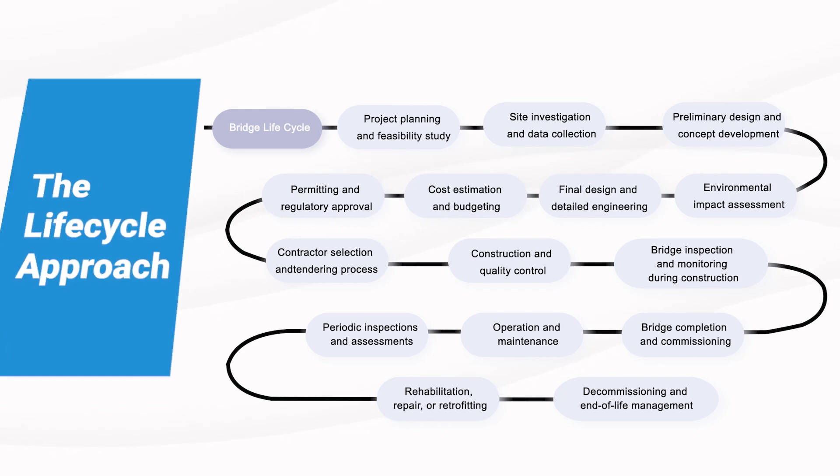So what are the trends, current or in the future? Obviously, advancements in materials, very important. No industry can move forward without material. We see that all around us, battery, everything is about materials. So material science is the key. Engineering, analysis, and design, obviously, that's what we excel in, and we continue to develop that. Construction techniques are changing rapidly. We need to look at that and adapt our designs and tools to that.

Monitoring and maintenance, once again emphasizing the life cycle. Design and construction is 3 years, maintenance and monitoring is 100 years. So how can we not think about that when we do our design, as an important part of the life cycle?

Aesthetics and sustainability, we can no longer hide from these two as we did in the past. In many cities, we drive around and we see, I don't like to use this word, but I'm going to make an exception, ugly bridges, ugly structures. And there has been a study in psychology that people who drive through this environment get depressed by the time they reach the office, because it's a concrete jungle and it's not aesthetically pleasing. So aesthetics and sustainability have to come into that.

BIM-based design we talked about a lot, so I can skip that and save some time. And embracing new emerging technology, we also saw a lot of that today, and I'll just focus on the bridge part of that, and collaborative design once again. So my job is quite easy because Richard set a great stage for me.

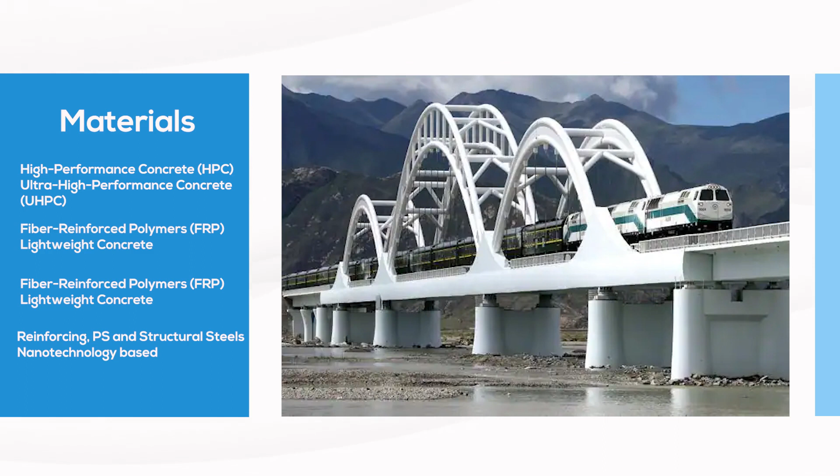It's just amazing. You don't even need reinforcement in a concrete of that kind. So definitely most application will be in bridges. Then, fiber reinforced polymers and lightweight concrete and so many things, and nanomaterials and stuff like that. So that's one aspect of the bridge design improvement that we must watch and closely embrace.

Let me come to structural modeling, analysis and design, which most of you are actually involved in. Now, where are the enhancements going? Obviously, in the modeling, we're getting new elements, frame, shell, solids, isolators, links, hinges, we have complexities there. Analysis, I put a lot of dotted lines because they are moving fast. Linear static, non-linear, construction sequence, long-term effect, moving loads, and so many things.

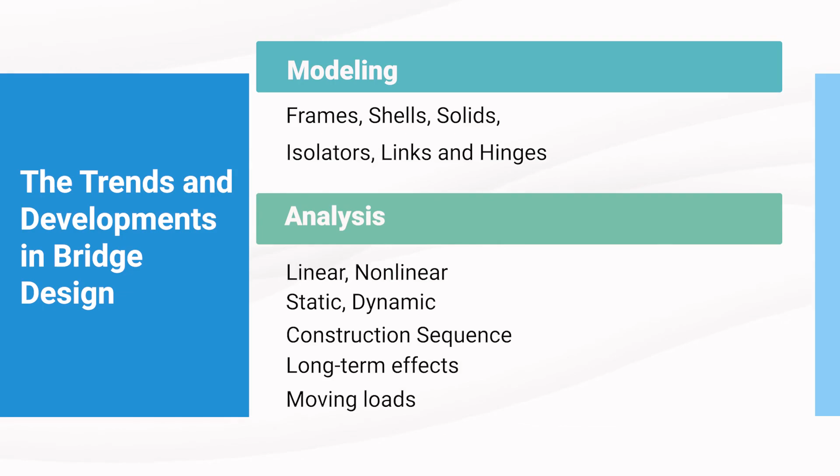So there's one whole stream of development in that direction on the analysis and design tools and the methodologies behind that. What could be the modeling strategies for a bridge? Because it's very different from building. For the building, you can actually have a clear modeling strategy. Buildings, not so many choices are there, and there's a reason behind that. But for the bridges, just start from the deck alone. You have many ways that you could model a deck, and people do that all kind of ways.

Starting from a simple beam model, you put the whole deck as a beam with a cross-section, and then say, oh, this is my whole bridge span with one line representing that. So as an engineer, you are happy with that. Try convincing anybody else that your one line is representing a 14 or 15 meter wide bridge with 7 beams and a slab and so many things. They would not understand or agree with your model, but somehow we are happy to do that.

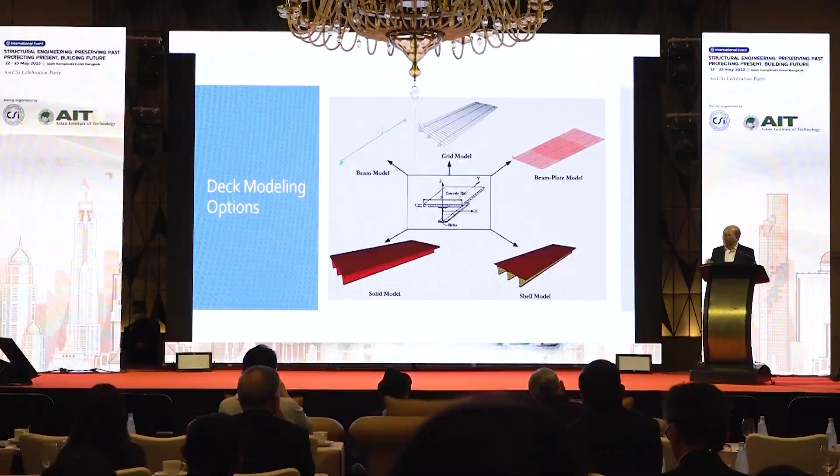And you might wonder, you should ask, which one is right? Which one should I use? Because all of them will give you a different result. So then how do you rely on or justify or use those results in the end and say, oh, this is what I got and this is what I can use. So I'm going to go a little bit more into that side, what model we should be using.

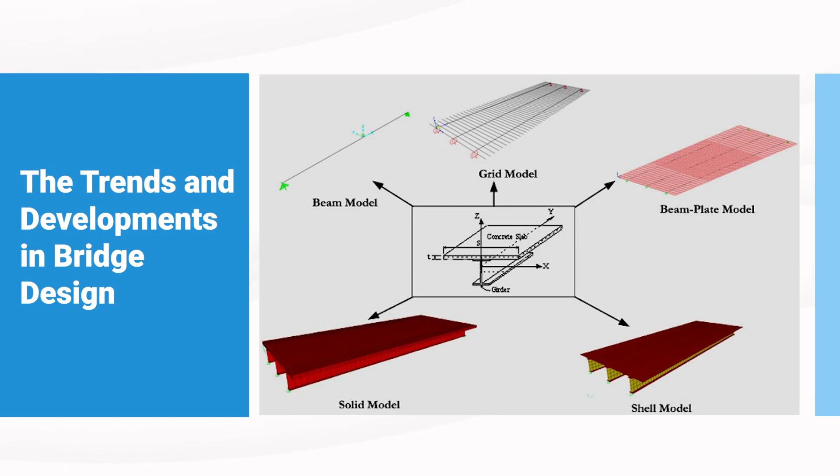For example, I am always bothered when we assume that the bearing of a deep girder, like a 4 meter deep girder, is at the center of that beam model. It's not, it's 3 or 4 meters below the deck. How are you not seeing that as engineers in the modeling? So you can see from here the realistic modeling of that bridge, which is also not a real bridge. It's a model of the bridge, but at least it's a BIM model. So it's more realistic looking. It at least has all the geometry complete.

But then how do you translate that into a realistic model? So we need to model the diaphragms, the bearings, the cap, everything should be geometrically complete if you are going to move forward into integrating this information with all of the other disciplines that we are working with. Over there, a line model or a pure shell model may not be sufficient.

So we not only need, but we have the capability to remain as close to the original model as possible using various modeling options that we have. And we get results which are also realistic. For example, when the girder deforms on the supports, the bottom of the girder moves differently.

So if you don't have the bearings at that location, you can't get the bearing forces correctly. If you put the bearings at the center of the beam, assuming it's a simply supported beam with 2 bearings, you won't get the bearing displacements correct.

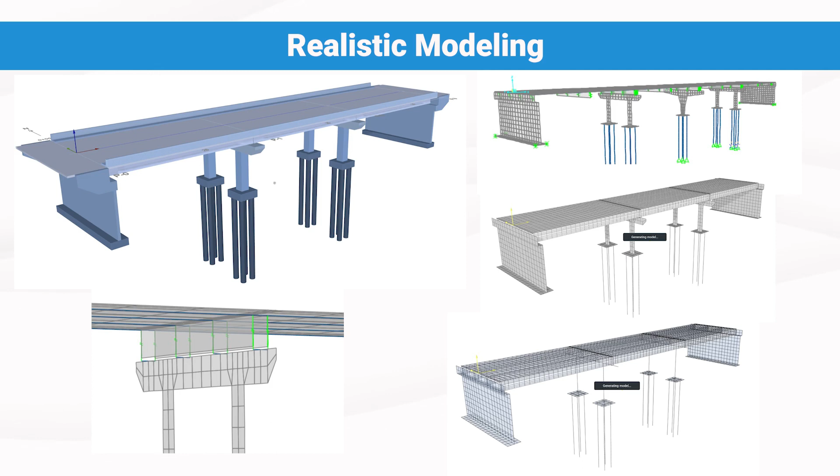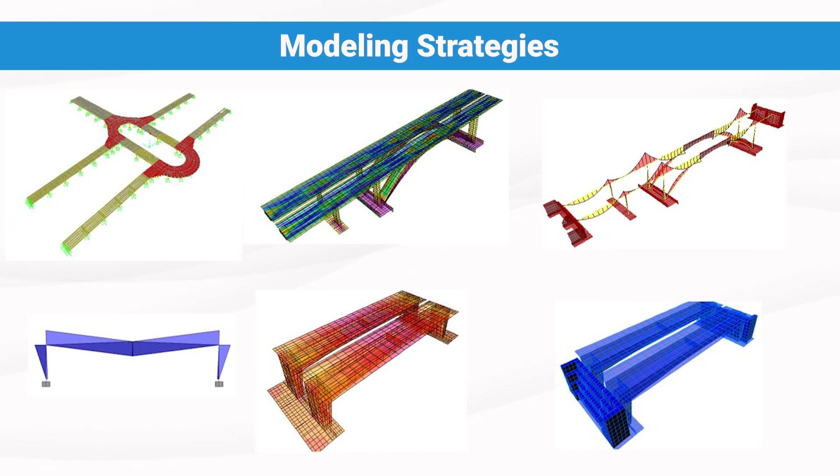So you can see here in modeling strategy, you could use a combination of just a frame or a shell, or a full shell or even a solid model, or just a 2D frame, that's fine too, if you're happy with that. I mean, it can be done. With experience and understanding, the first model can be as good also. But now that we have the tools, we may need to go more, and then it will be best.

It's amazing to me, mechanical engineers have a device like this or smaller, and they will model it using solid elements, always, right? But we have a huge concrete block which looks very, very big and solid, and we tend to model it by a thin shell or a frame element, because somehow we don't see the dimensions correctly. So we have the opportunities to model them as realistically as possible

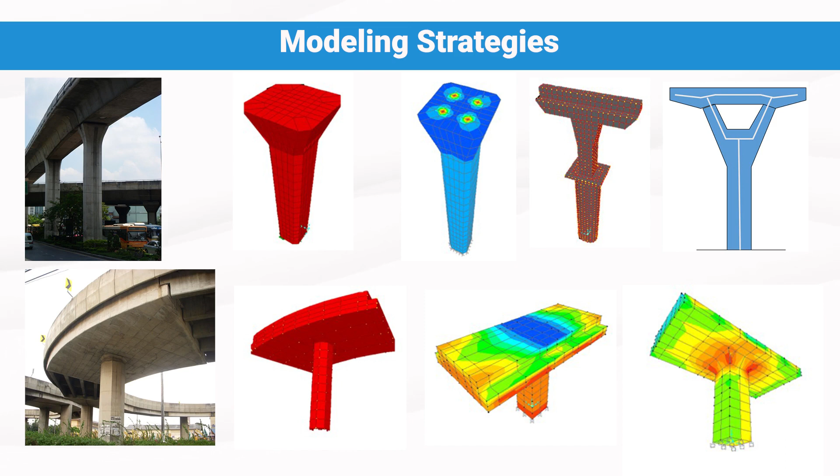and get the results. But yesterday they were talking that as soon as we get stresses in a model, engineers are lost. How do I calculate reinforcement from all the stresses? It's a very nice plot, but where is the reinforcement? How do I get the top bending moment, shear force and torsion? That's what they want in the end. And this doesn't give that. We need more understanding, more post-processing to be able to go to that level. And that's where now the software needs to help us with that.

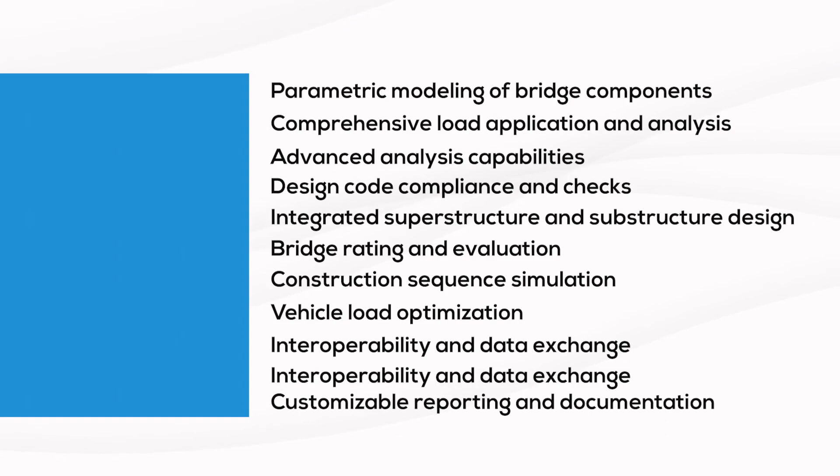CSiBridge, of course, I can't help without talking about that. CSiBridge is one of the software that does a lot of those things if we are willing to put the effort and the time to do that. So this program has parametric modeling. This is one of those slides I'm going to leave you with, and then you can see this poster outside. It has a lot of modeling and analysis capabilities, a lot actually. In fact, many of them did not even fit on this slide, and that much power is available.

And that's, I think, the main strength of CSI software beyond others, because the analysis capability is really deep, and then you can just keep on going and never finish. You can start with finding one thing and keep clicking all the in-depth, and you can have 11 forms open, and you still haven't put all the information there.

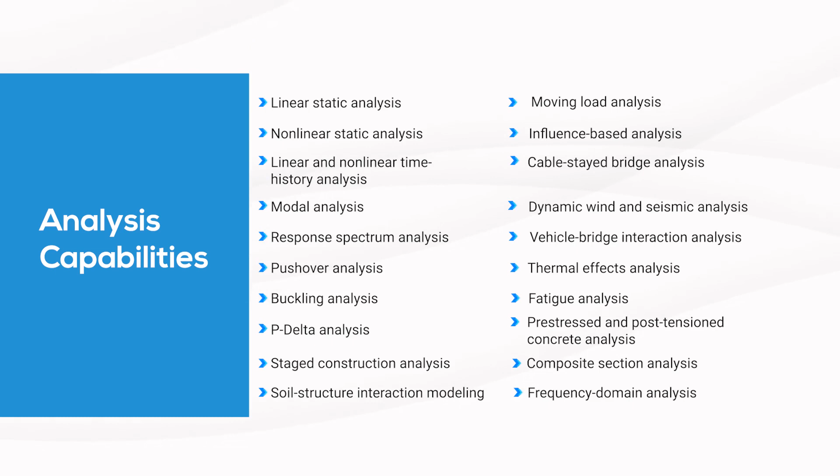In my class, I normally teach material. You define your material. Okay, this is 3 values, modulus, Poisson's ratio, thermal expansion, and then from there you can go on to define the nonlinear properties of each of the material and the temperature dependent and the age dependent and so on and so forth. It never ends. And you can do all of that.

Especially I want to mention this very, very powerful tool that engineers have. And if they just understand this, a lot of the complex problems in bridge analysis could be solved by using the powerful nonlinear elements. Because in the modeling, we have 2 things. Things that we see and things that we don't see. So it's a physical modeling and it's a behavior modeling.

For the behavior modeling, you need something that also is a behavioral concept, and the nonlinear link is that. It can help you to connect or disconnect things as you want them. So it's really powerful. And if we want to really do advanced modeling, this is something that we need to learn.

So just a few quick animations of what we could do for the moving load, because that's another biggest differentiator between buildings and bridges, the effect of the moving loads and the fact that they're moving all the time. So the load combinations and cases that you need to analyze are thousands if not millions.

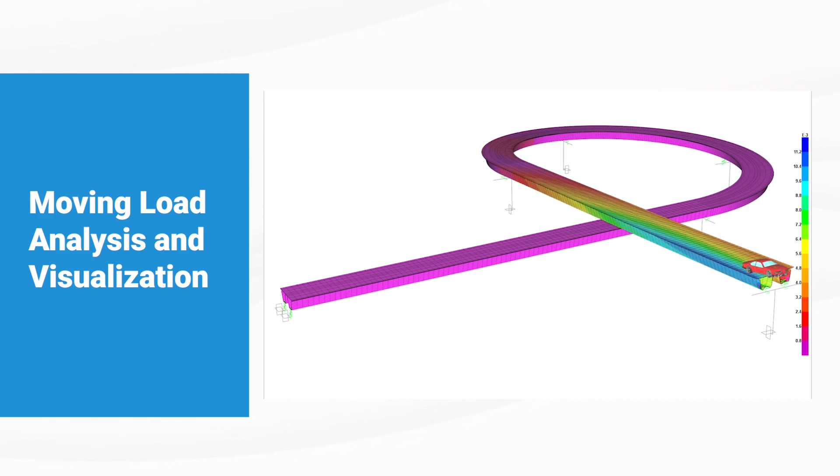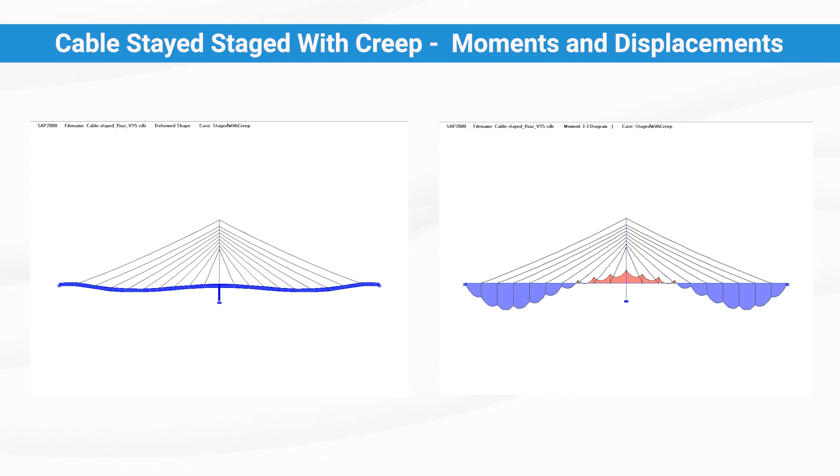Second is the effect of the time-dependent forces. So when you construct something and you leave it there, after a while because of the creep and shrinkage and relaxation and all of that stuff, things will change, especially in bridges. And over time, what you saw in the beginning, after 5 years, it could be opposite of what you designed. So where do you stop your design without incorporating the time-dependent effects? And once again, using staged construction analysis, time-dependent materials, and so on, you could model that.

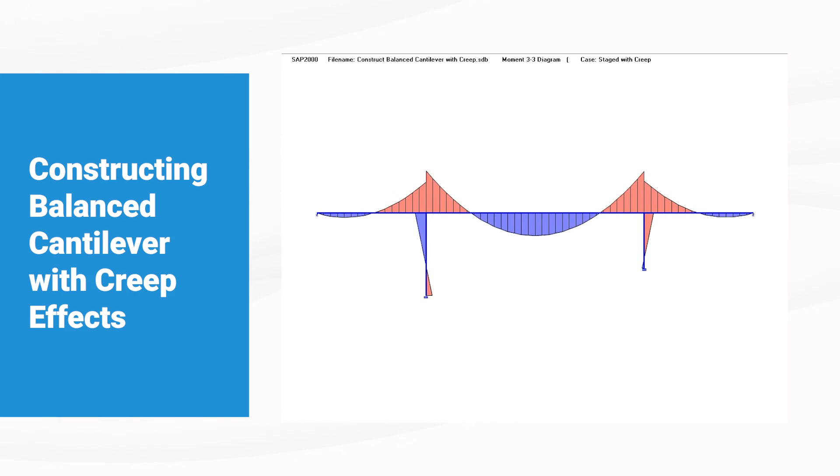This is another example where you can see it's a balanced cantilever, and you will see that over time the bending moment diagram is changing; it's going the other way. So with time, things can completely reverse, and if we don't do that properly, in a bridge especially, we will be missing out quite a lot.

And then there's something beyond structural engineering, which is ACM. ACM is advanced computational modeling, which combines structural engineering modeling but also many other modeling techniques, using CFD and all of the physical modeling that is not available in traditional structural engineering software. For example, fluid flow around the piers is one example, and so many other things.

So because of the main model, you could run the same model in physical behavior models and also run it for the structures and combine the effects together. For bridges, so many things could be done with that.

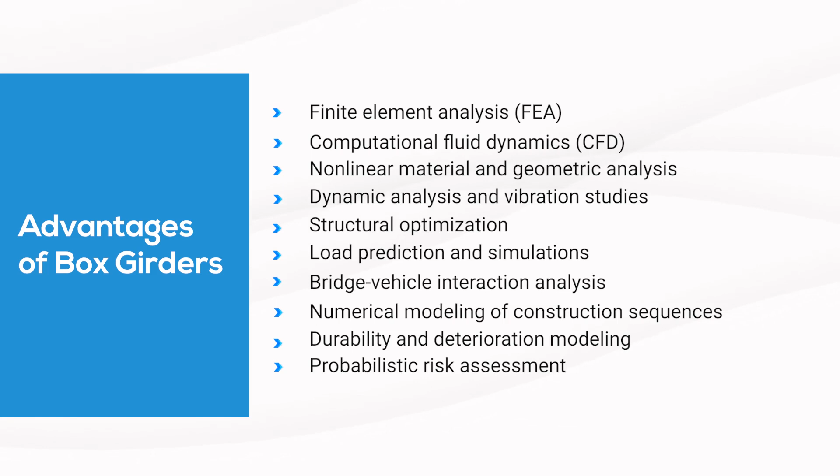Let me say a few words about box girder bridges, both the opportunities and challenges. Box girders are becoming more prevalent than in the past. I remember one project in Sri Lanka. We had a huge debate for several months about whether it should be traditional I-beams or a box girder, because this would be the first continuous box girder bridge over there. So there was a lot of debate: who will design it, where the contractor will come from, where the equipment will come from. So there's a whole story behind that.

But box girders are really good, and they have offered a lot of advantages in terms of efficiency and the ease of following the complex geometries that we have in urban areas. They just have huge advantages over traditional beams: reduced number of expansion joints, smooth ride, incorporation of the slopes and the super elevation and all of that.

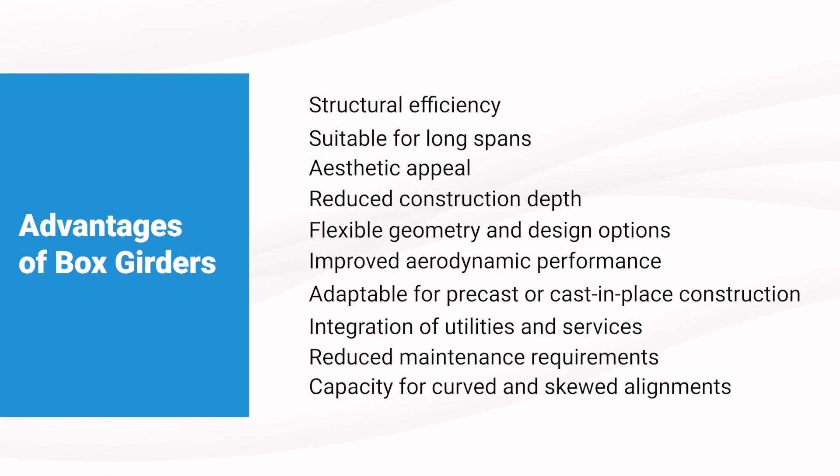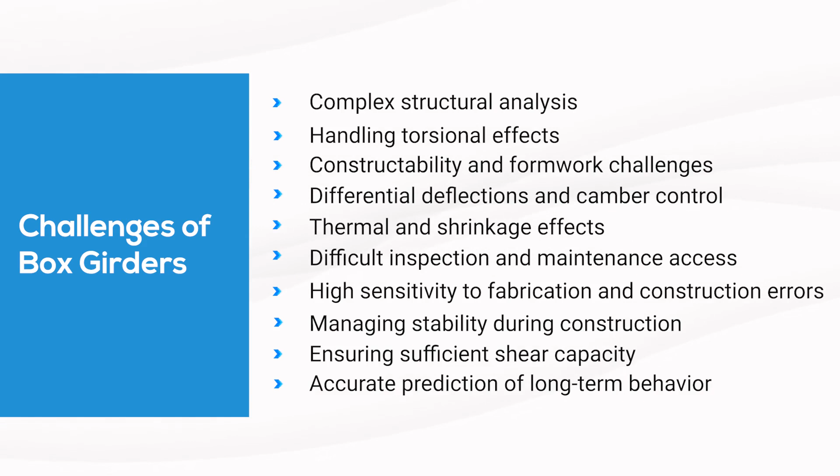But at the same time, they come with a lot of challenges because they are complex structures. Modeling them properly is difficult; the geometry is difficult. Sometimes they are segmental, so modeling their segmental construction over time is complex. So there is a huge challenge in modeling and analysis, and also in construction, making sure that everything is match cast and connects together, and the stressing sequences. So many complexities are there in the entire process, and people have to be really good at this job for it to work in the end.

But let me come to another important structural component which deserves a special mention, and that is the abutments. Abutments are the places where the soil or the road ends and the bridge starts. That is where you have two systems coming together. And this is very complex because, unlike a building foundation which is below, this is at the ends of the bridge, which means it is preventing movement. And not only preventing movement, it's also imparting forces. So this is complex in many ways.

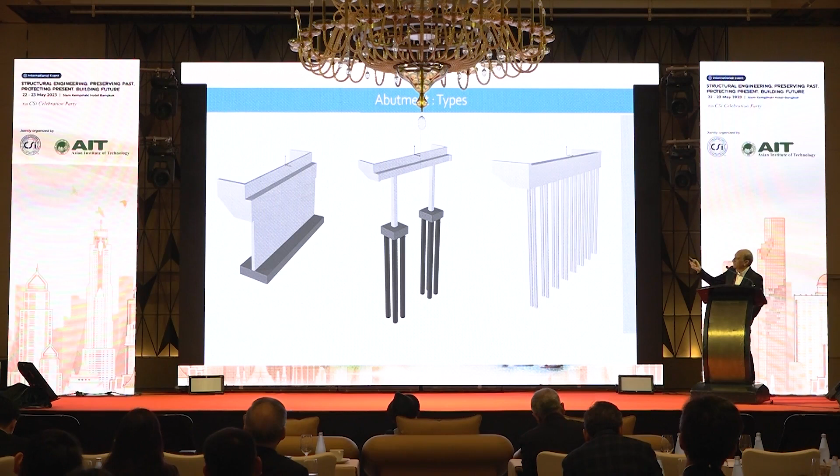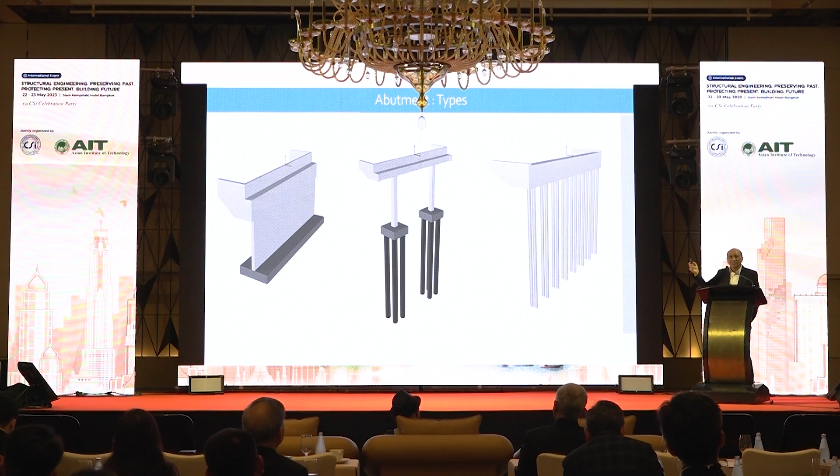These are the three most common types of abutment. The closed wall abutment will retain the soil on one side and the bridge on the other side. So when you put the bridge there, the abutment could be pushing the bridge, depending on the height, because of the active soil pressure. The bridge could be pushing the soil because of movement from vehicle braking, temperature effects, or earthquake movements. So we don't know what is happening at what point.

What are the bearings doing? What is this trailing rod doing? How much can the bridge move before it hits the end wall and pulls that? We have seen bridges falling off the abutments during earthquakes without a restraining block. But then what about the restraining block? Because it will allow a little movement and then it will start to engage.

I remember in my bridge class several years ago, I gave an example problem to the class: give me a force deformation curve of a bridge girder to the abutment from small to large displacement. I said you can use the internet, open book, whatever you like. And only one student got it right in the end, because it's a very conceptually difficult thing; the whole movement is very complex. When does the abutment become active? Where is the soil stiffness, and so on and so forth.

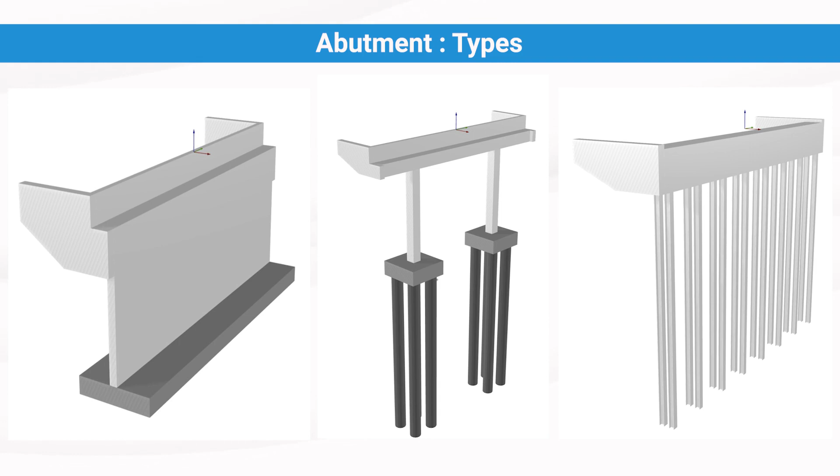So it's a really complex thing to do, because if you look at the abutments on the two sides, I remove the slab here, and the right-hand side is the integral abutment, which is becoming very popular these days. That means no bearing between the bridge and the abutment. So the abutment is connected to the girders, put on a very flexible set of piles, so that it just simply allows the bridge to move, hence removing many of the complexities of a traditional abutment

that we talked about. So in this case, it just becomes kind of a spring support for the bridge, because we're simply allowing the bridge to move as it wills and put it on very flexible piles, which are not really restrained by the soil either. So that's a good way to solve some of the problems. But as you can see, the approach...

First of all, if the bridge is doing nothing, the abutments are under soil pressure anyway. If the bridge is expanding or contracting with temperature, it's trying to move, and the abutment is trying to stop that. When the vehicle comes close to the bridge, on the approach slab, the vertical load from the vehicle will put a surcharge on the side of the abutment, putting more pressure, changing the movement.

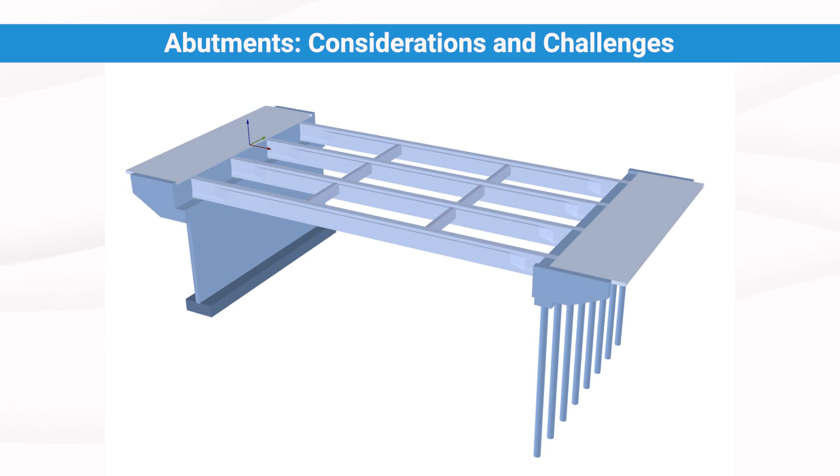And when there's an earthquake, so this is a model of earthquake modeling on two bridges. In one, the abutment is simply supported like pins or rollers. In the second one, it is flexible, trying to model reality more using the spring concept. And you can see how the movement will be different. The bridge, the left side and right side, you can see how much difference in the behavior there can be just because we model the abutment differently.

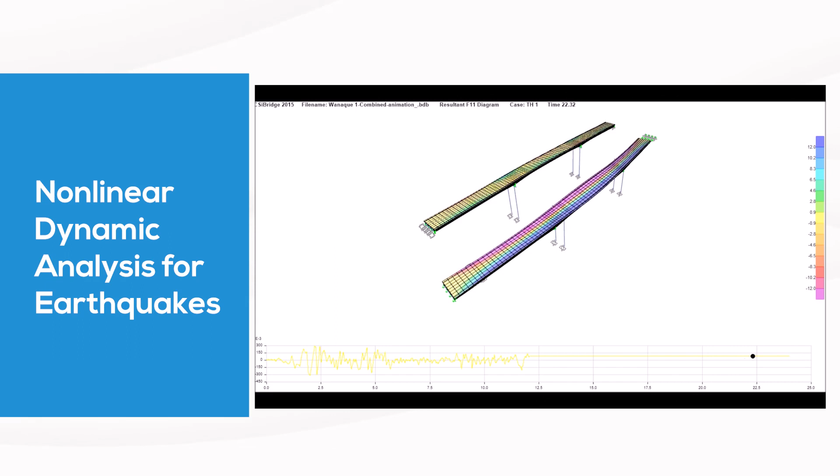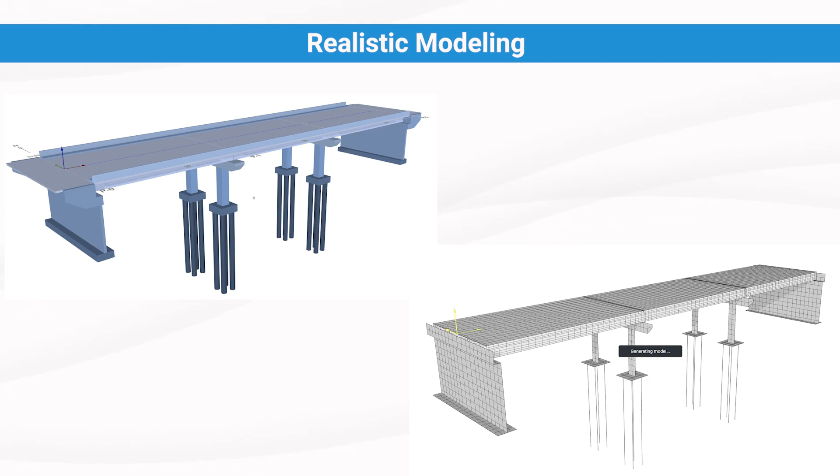So that's how important the modeling of the abutment can be, because we can be between those two extremes. So we now have the ability to create more realistic models. The problem is getting the properties for this kind of abutment is still very hard. Soil layers and all of that is not easy. So we still need to learn more about interaction between soil and structure and all of the geotechnical properties that we need.

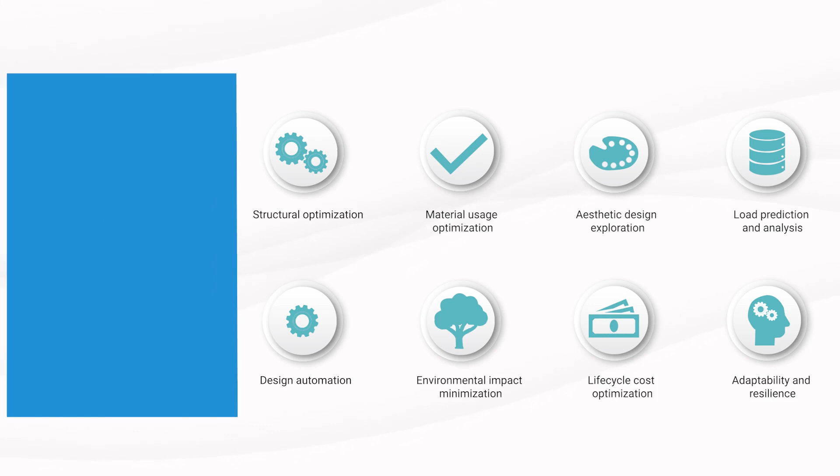Let me come to another interesting development, which is generative design, parametric and generative design. We've heard a lot about parametric design, but I'm just going to combine it with generative design. So generative design, as always, the architects were ahead of us. They adopted BIM before us. They do all the technology before us. We are always late to follow. So in parametric generative design, we can optimize, we can do a lot of things. Let me skip that. These are the first few examples of parametric design applied to real projects.

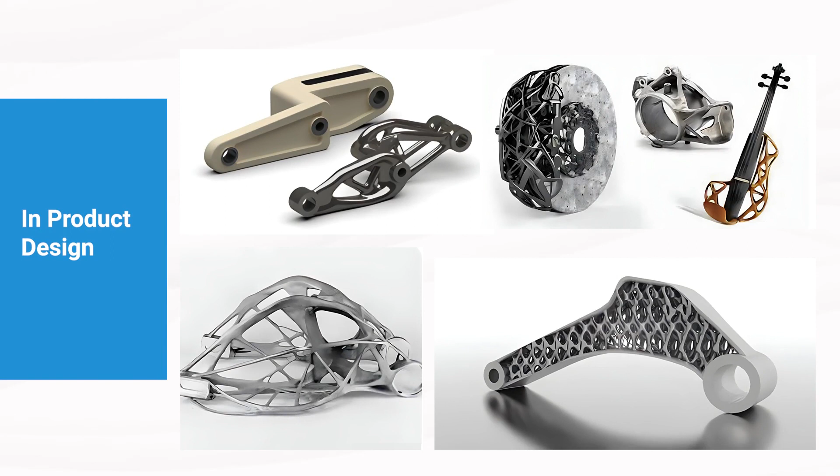Mechanical engineers aren't far behind. So they're trying to optimize. The left-hand side is a traditional door handle. The right-hand side is a door handle generated by generative design. And the same is the case with all the other products. This is a hinge from one of the axles from a car. So what they're doing, basically, is optimizing, trying to remove all the material not needed through repeated cycles.

You create a solid, analyze it, wherever there's low stress, remove material, analysis, remove material, analysis, remove material, continue with the generative design until only what is needed is left and everything else is gone. And that's how optimization, together with other technologies, is helping most of the other disciplines.

You take a block of material and you go through cycles and keep removing things which are not needed. But the problem with this approach is it's uncontrolled. You end up with things that can't be made, which are not realistic, which are not practical, which are funny to some extent.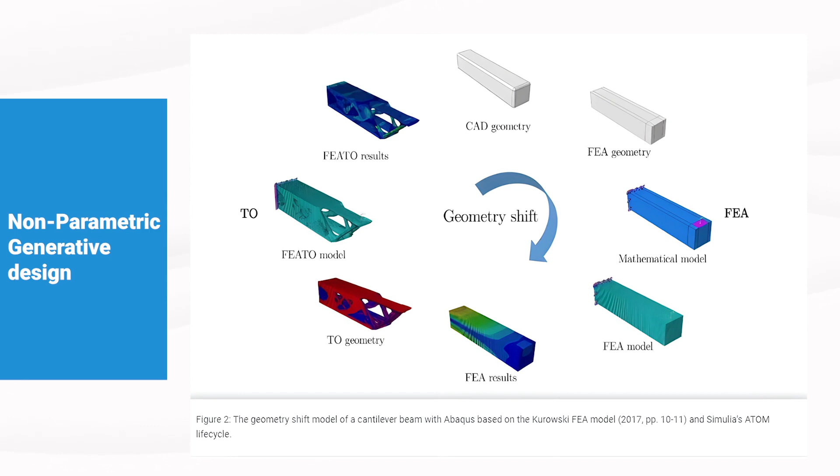So we can combine this generative design with parametric generative design, where parameters control how the generative design will proceed, which parameters cannot be changed, how much they can be changed, what are the values that they can take. And there comes this generative design with 3D printing.

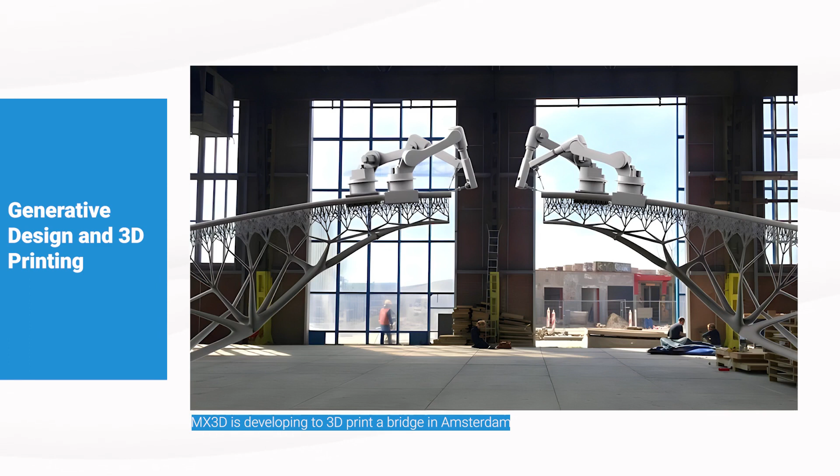Let's come back to our bridges. And let's just talk about one element of a bridge, the pier. Because this is very obvious, very visible, one of the elements, and it could be very high. Alternate shapes. Piers are fascinating to me because there's so much opportunity for creativity in bridge piers. So these are the parameters that could define a bridge pier.

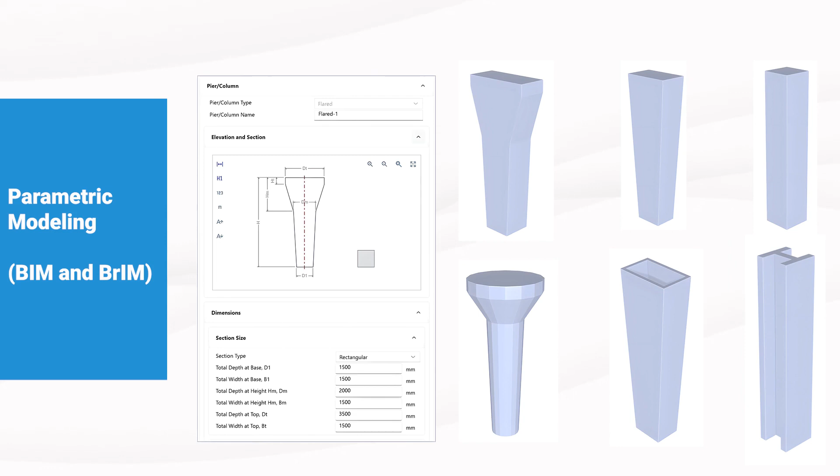Let's see what parametric generative design could do for this one. Parametric generative design can actually take those parameters, vary their height and dimensions in all ways and try to find where you have the real solution that you're looking for. Depending upon what you're looking for, you can define the parameters and generative design can stop there, but within those parameters and only changing the parameters that you want.

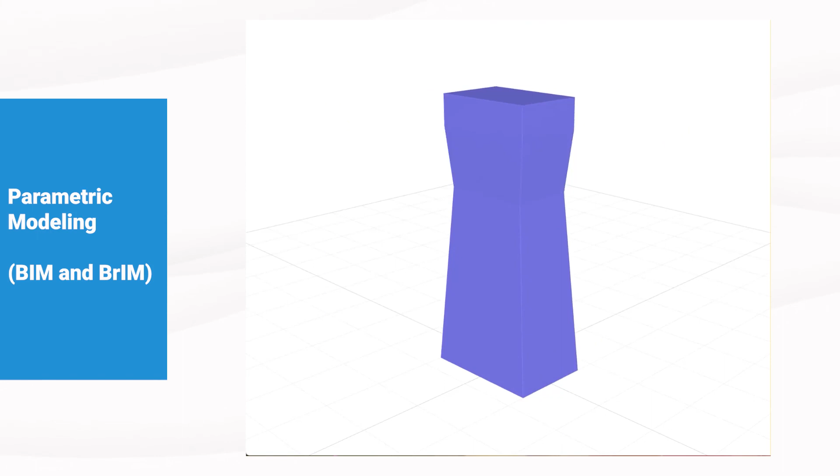You can see here that you can run thousands of iterations very quickly and come up with the final design which you couldn't conceive by yourself. And the reinforcement cage inside could also parametrically vary. So you do the same thing. When you change the parameters of the pier, the reinforcement cage follows because it's also parametrically defined. So then you can also get a cage which will be realistic.

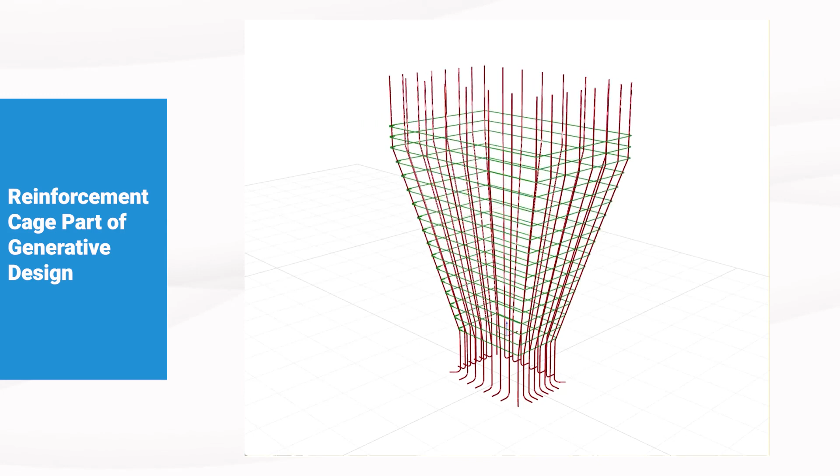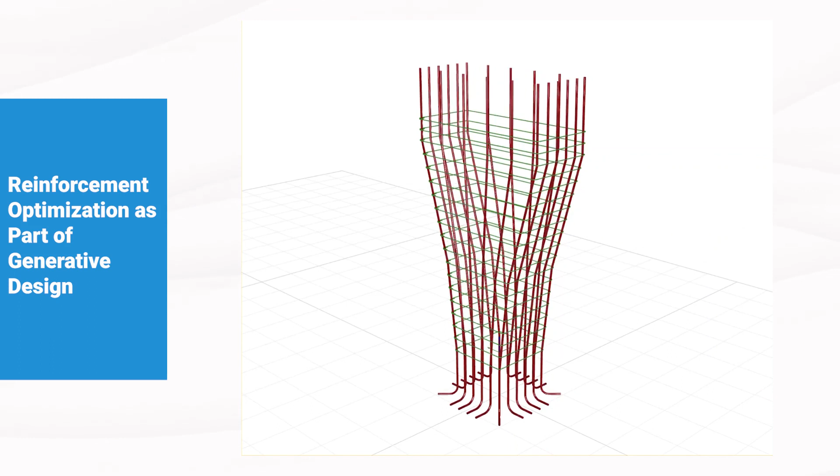And you can also calculate the quantities and the stresses and capacities for each cycle of generative design and check whether we are satisfying that or not. Or you could just do a generative design only optimization of the bar size and number, and then check the capacity at the same time. So there are a lot of advantages in using generative design concepts here. Bar size, spacing, number, all could be done.

And in the end, you can end up with this whole complete cycle of fully parametric, generative, integrated design, because you start with parameters, you create a model, you create a finite element mesh, completely compatible with that, you do the stress analysis, from the stress analysis determine the actions, section cuts, get the forces, do the design combos, check the PM diagram, see if it is all okay or not, do the rebar cage, verify that, move on to the quantities, move on to the rebar schedule, and you're done.

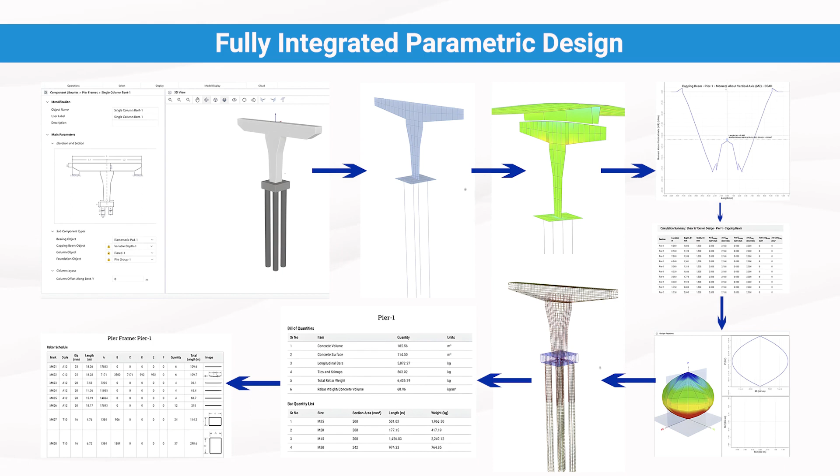So you just go back home, sleep, next day you come back, you should have your pier done. So that's the whole idea behind fully parametric generative design once we plug it into the full system. There are many considerations that we can handle. By parametric design, we could handle situations in modeling that otherwise would be missed, like cross slope in the deck, the relative level of bearings, the abutments, the capping beams and so on, and keep that in the analysis model.

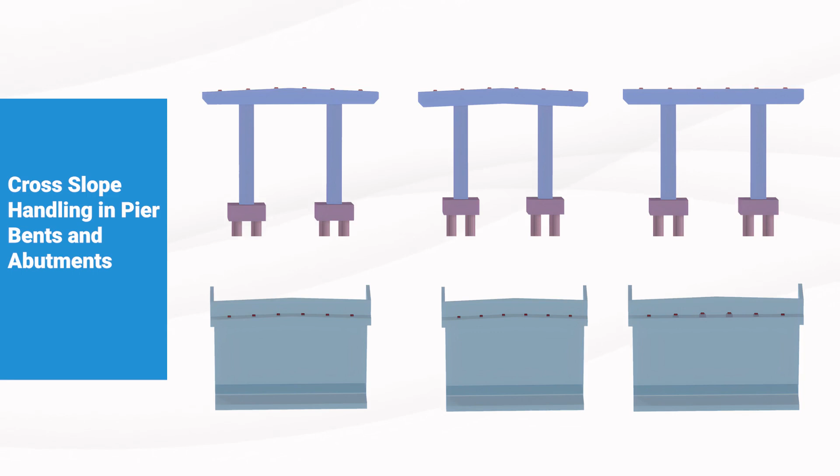Because if you're doing it by hand, you don't really care about bearings being 15 millimeters above the other, they are flat to you. But for a BIM, that 15 or 20 millimeters matters. It's going to be constructed, it's going to be matching with the rest of the dimensions, you can't ignore it. So we could put that into the system. Similarly, the proper modeling of the bearings, the girders, the ends, the cutoffs and all of that could now be part of the model rather than lumping them into a pin or a roller, right?

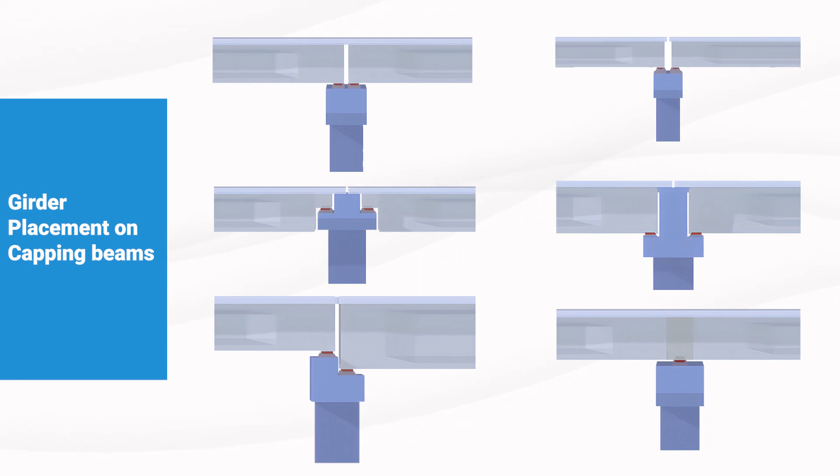So we could have more realistic modeling of the whole system because we keep the parametric 3D stuff intact throughout the process. And you can see from here, the finite element mesh matches with that and everything connects to that, and we maintain that. When we come back, we will not be losing any information and we will know which element belongs to which part of the pier and so on. If we want to puncture a hole in this wall, we know which element will be affected.

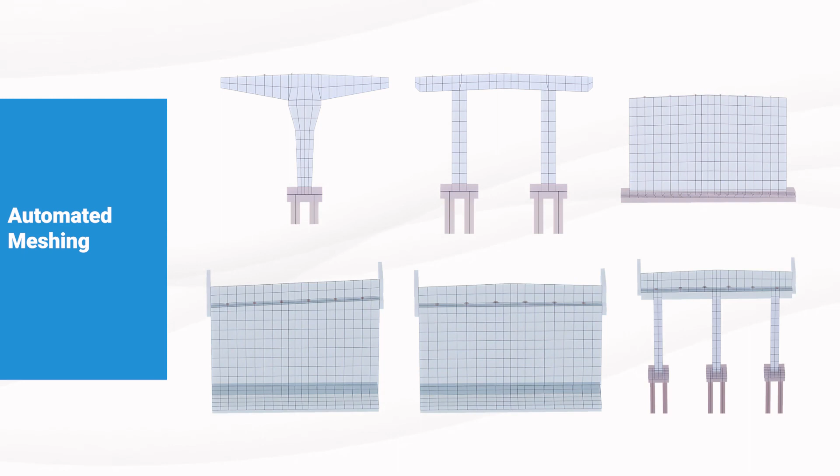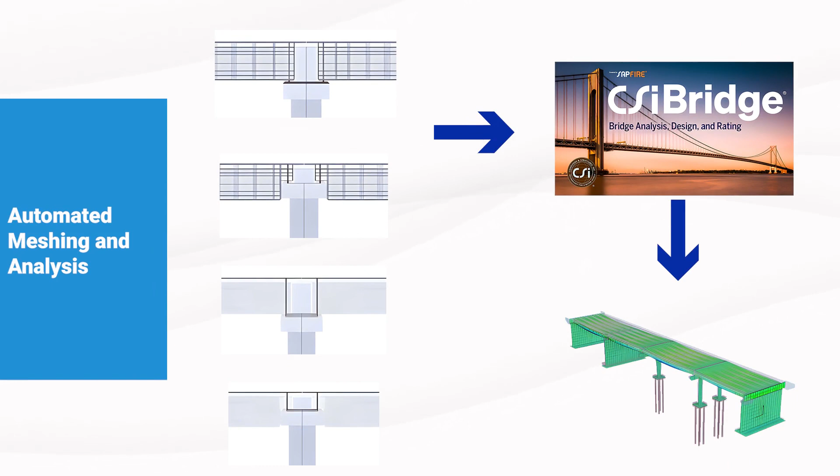And so we can do a complete modeling of the bridge, get all the mode shapes and whatever you need from that, and you can handle all kinds of stuff. They were there with various complexities in the process. There are also advancements in construction that we need to be aware of, and we make sure that those advancements are now part of the design development. As I showed you, 3D printing, generative design, they all have to be the construction technology integrated into the whole process.

Monitoring and maintenance, we cannot miss that, and in my opinion, the software should anticipate already that this bridge is going to be instrumented with IoT. How am I going to get the IoT sensor data back and update the model and calibrate the model for the next 100 years? So rather than sell the software to the designer, give it to the owner so that they can monitor and also look at the bridge for the 100 years, not just during the design process, because the monitoring is integrated into the analysis process.

We can't ignore aesthetics and sustainability, as we have been hearing since yesterday, in our profession, or any profession for that matter now. That's why I mentioned to you, architects are coming in, sustainability consultants are coming in, all kinds of consultants are coming in, because as engineers, we are missing those integral parts in our basic design. So somebody is coming in to fix the issues that we didn't consider. So we must now incorporate sustainability and aesthetics, be aware of them and think about them right from the beginning.

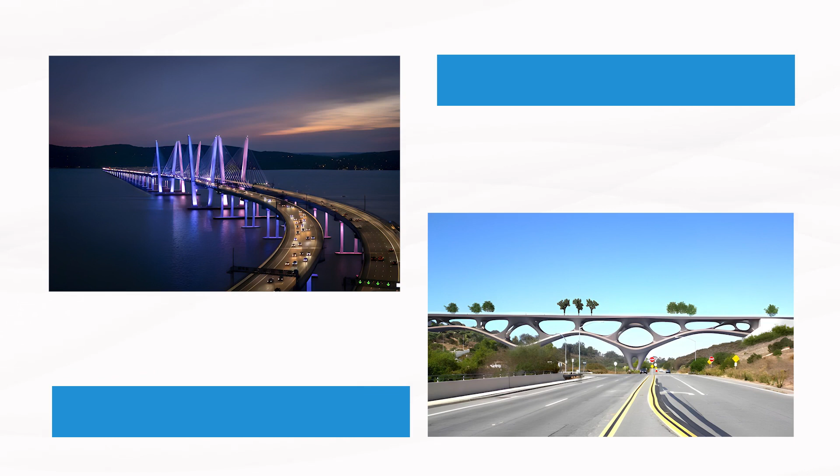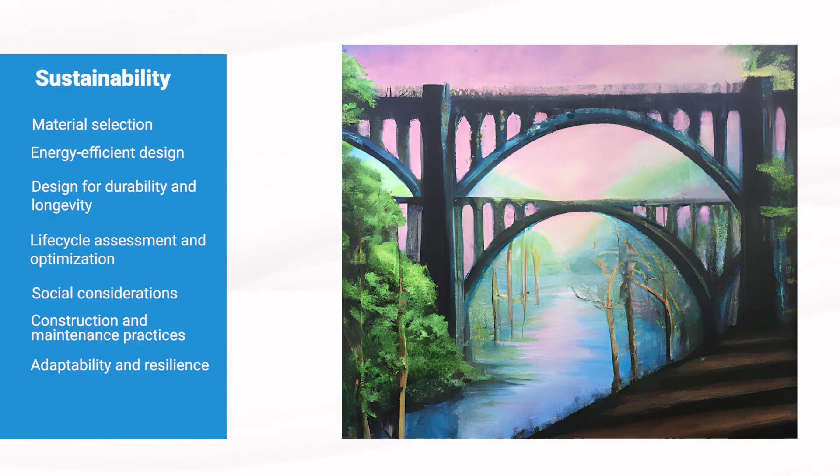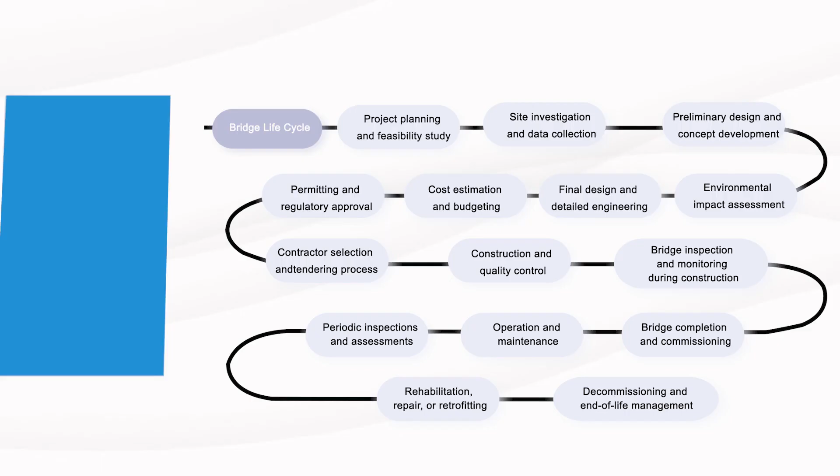Collaborative work, I don't need to say much because we heard a lot about that. So we have lots of tools to work collaboratively. BIM is a very good platform. If you use bridge BIM, and then use all of the other technologies, cloud computing, cloud storage, all of that stuff that we already heard about. Once again, back to life cycle, try to keep all the construction stages and all the people involved together in the collaborative work.

Cloud-based collaborative work is now a reality. We have seen that in practice, and I'm so glad Richard's presentation was before me, because then we have already seen that in action, so we know it's possible. It's not theory anymore, it's actually being done.

So let me come back to a couple of concluding remarks. First of all, future trends and developments will integrate technologies, life cycle phases, sustainability, stakeholder and public interest all into that. We can't escape that anymore. And don't forget, AI will play an important role. We have already seen that. I'm just curious, how many people have not used ChatGPT? So everybody uses that. So you know how scary it is getting.

So let me leave you with this thought. Very soon you might have a chatbot which will let you do this: Can you please design and detail a 150-meter long, 4-lane straight overpass bridge with a height of 7 meters using I or T girders for highway loads using AASHTO standards? Done. You get the output. It will be pretty good. And I'm telling you, this is not too far.